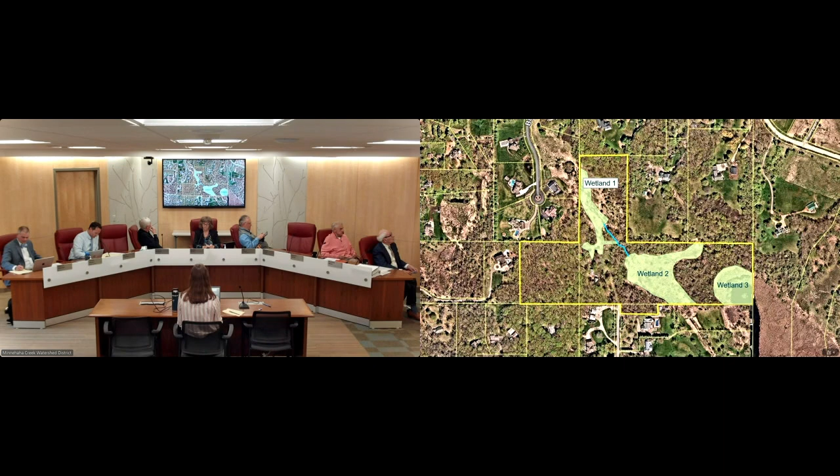As you can see on the right side of the slide, a channel on the North Arm Bay in Lake Minnetonka extends into the site. Currently, 3 wetlands are located on site and are part of a larger wetland complex that ultimately drains to the east to the North Arm Channel of Lake Minnetonka. The blue arrows show the direction of drainage.

So the last 2 slides show the existing condition. On this slide is the proposed site plan with the proposed 5 lot lines. The lots will be graded to include a hard-packed building pad, and then each individual lot will be sold to individual builders for the house construction. All single-family homes will fall under this permit's umbrella and will be reviewed in accordance with our rules.

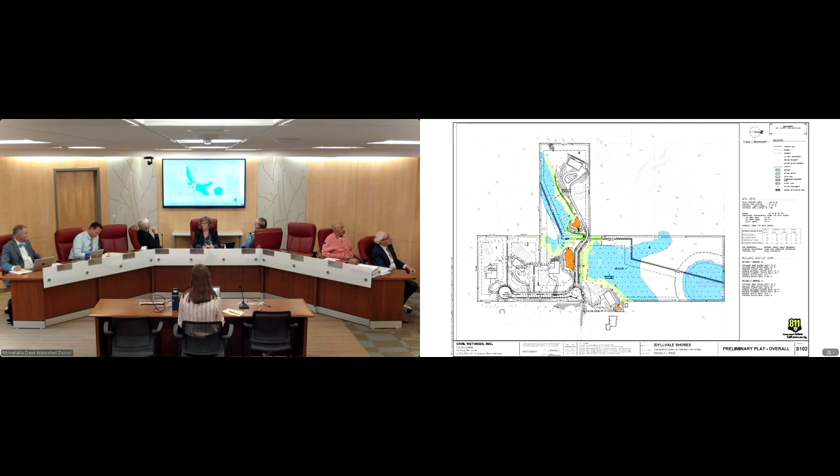Now moving on to the MCWD rule analysis for the 5 applicable rules. The first applicable rule is the erosion and sediment control rule. To comply with rule requirements, the applicant is proposing silt fences in areas down gradient of the proposed disturbance, shown here in red, as well as erosion control logs that will be added around the stormwater basins after they are constructed. Additionally, there will be inlet protection and a rock construction entrance in place during construction. At the end of construction, this site will be stabilized by turf grass seed and plant plugs.

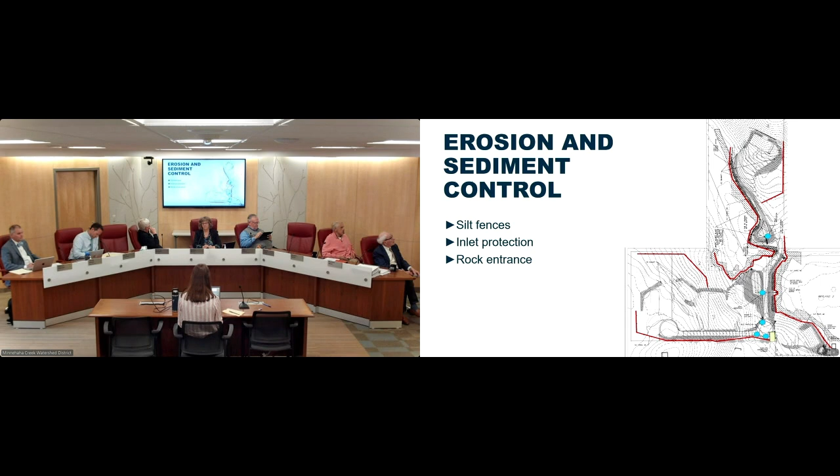Secondly, the stormwater management rule is also applicable, and with this, the project is required to treat 1 inch over the proposed new impervious surface. To meet this requirement, the applicant is proposing 3 stormwater basins, circled in red, with one being infiltration and the other 2 being filtration basins. Volume control will be achieved and rates will not increase. Bounce on down gradient water bodies will not exceed the allowable amount. Additionally, the freeboard requirement between stormwater basins and the building pads will be met through hydraulic disconnection.

Hydraulic disconnection is met when there's some kind of physical constraint that does not allow water to move in a certain direction between the basin and where you're trying to disconnect. Specifically for Basin 2, the southernmost basin, there's an off-site house directly to the south, so to provide hydraulic disconnection between that basin and the off-site house, they'll be adding a berm and a retaining wall installed directly up gradient of the basin.

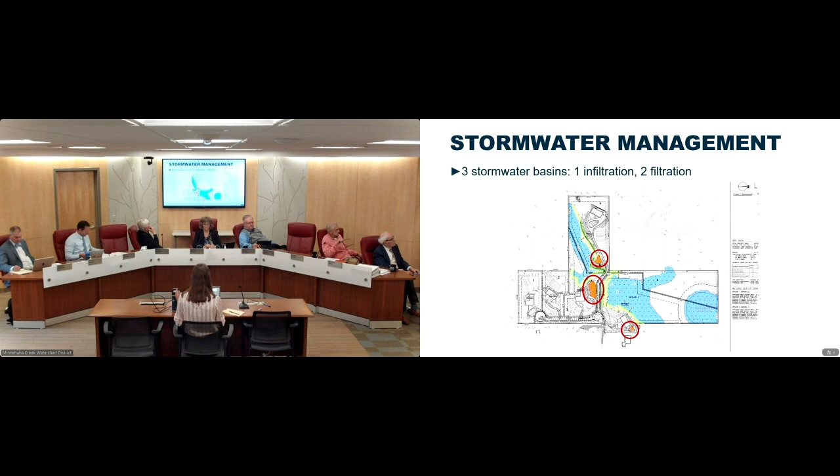So water cannot overtop and go towards that off-site house. The water body crossings and structures rule is also applicable for a culvert replacement in the intermittent stream in order to access the northern part of the site. The existing conditions are 2 existing 18-inch corrugated metal pipes, and as part of this project, the culverts will be replaced with 2 36-inch reinforced concrete pipes to be able to place a raised driveway on top.

This will safely access the northern lot without backing up water upstream of the crossing. In order to meet this rule, while the project will change hydraulic capacity because the culvert diameter will increase, the hydraulic capacity will be maintained and 100-year floodplain elevations will not change upstream or downstream of the culvert. Additionally, the project will not increase rise in upstream or downstream flood stages.

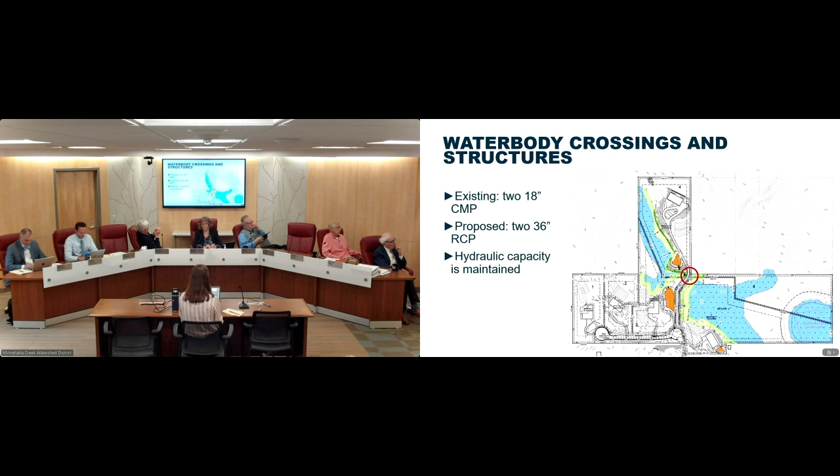As part of this rule, the project will also preserve navigational capacity, wildlife passage, not promote erosion or affect bank stability or water quality, and this is the minimal impact solution for the proposed need. MCWD staff and the district engineer have reviewed all of these items and confirmed compliance.

The wetland protection rule is also applicable, and wetland buffers are required on all wetlands down gradient of the proposed impervious surfaces. Wetland buffers, shown in green, will be provided around wetland 1, which is a managed 2 wetland, and wetland 2, which is a managed 1 wetland.

Buffer averaging and base width reduction will be utilized for both wetland buffers in accordance with the rule. The applicant will also provide buffer monument signs to mark the wetland buffer locations.

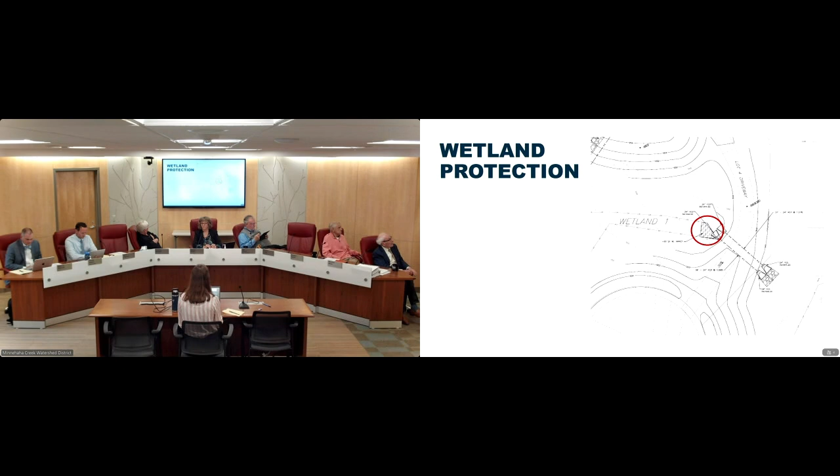Additionally, in accordance with the Minnesota Wetland Conservation Act, an exemption was applied for and received for a small amount of wetland impacts. This exemption falls under the de minimis section of the Wetland Conservation Act rule, which is typically used for very small wetland impacts, typically associated with infrastructure. So in this case, it's like a culvert.

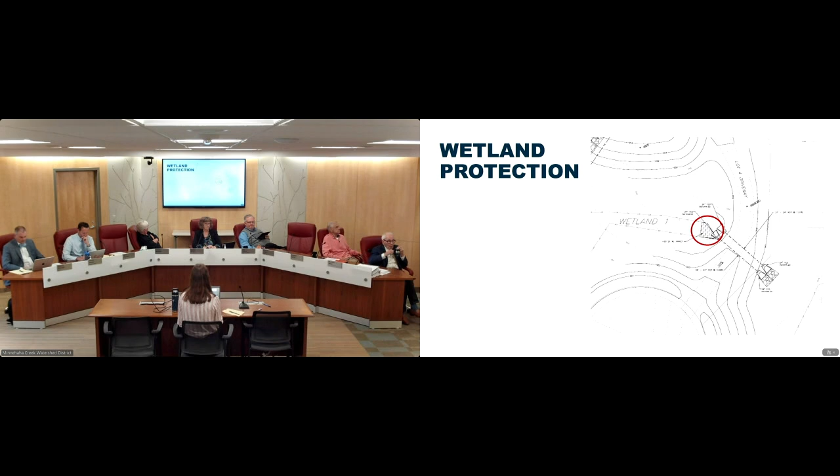Projects that fall under this exemption do not require replacement. So for this, there will be a total of 90 square feet of permanent wetland impacts, and these were approved under the Wetland Conservation Act for the culvert replacement.

With this culvert replacement, there will be work within the intermittent stream's floodplain. So to meet the floodplain alteration rule, the applicant is proposing more cut within the stream's floodplain, shown in green, than fill, in red, which is meeting and exceeding rule requirements.

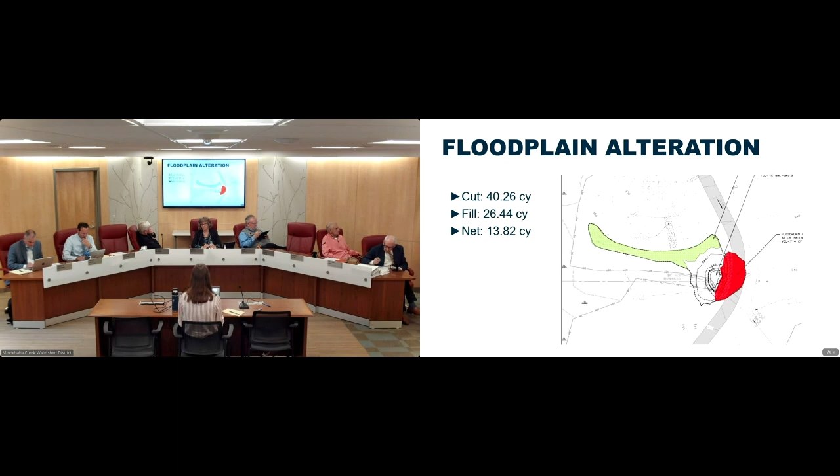Additionally, freeboard between houses and water bodies on site will be confirmed when the single-family homes are built under future permits and different developers. But as we said before, the building pads do meet hydraulic disconnection because of the way that they are grading and changing the slopes to raise up the building pads. To sum up the rule review, all 5 applicable MCWD rules are met.

I'll now move into discussing concerns that we've heard from the public. MCWD staff have been coordinating with members of the public since last November about the project and have given guidance about our process and the status of the permit review.

After sending out the public notice in late May, we engaged in an in-person meeting on June 3rd with the neighbors about the project here at the MCWD office. An Orono City Council member was present, as well as 4 residents who all live within 600 feet of the property. There were also concerns from an additional resident who was unable to attend, and those concerns were brought to the meeting. During the meeting, we discussed their concerns about drainage, negative impacts to wetlands, monitoring, and future permitting requirements.

I'll discuss each of these concerns in greater detail in the upcoming slides. So the first primary concern relates to drainage and runoff from the increase in impervious surfaces on site, as well as a concern about decreased water quality because of additional impervious surface.

As we discussed previously, the project is in compliance with the stormwater management rule, which requires impervious surfaces to be routed and treated. A couple of vegetated swales, shown here in yellow, will be graded to prevent impervious runoff from directing directly into the wetlands and instead route them to the stormwater basins.

As we will discuss in greater detail in the upcoming slides, there will also be erosion control in place to prevent sediment from running into these wetlands during construction.

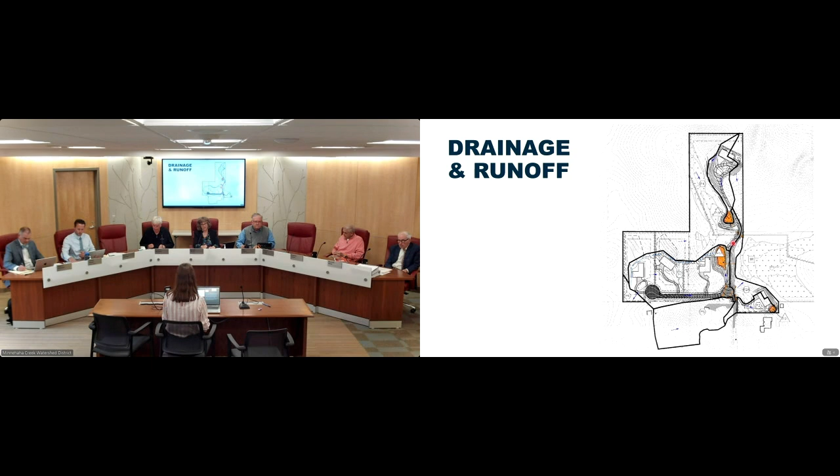These neighbors aren't related, with all these compliments they handed out, are they?

We next have item 11.1, Resolution 25039. Mr. Whisker presenting on Minnehaha Preserve work status, et cetera. Certainly. All right, well, thank you, President White.

Board of Managers, item 11.1 before the board for consideration this evening is Resolution 2539, which, if approved, would delegate authority to District Legal Counsel to terminate the contract for the Minnehaha Preserve Boardwalk, declare contractor default, authorize legal counsel to prepare and provide all notices to the bond issuer, Granite Re, and take any and all other actions legal counsel deems necessary under the contract and the bond to protect the district's legal and financial interests. So that's the purpose of the action.

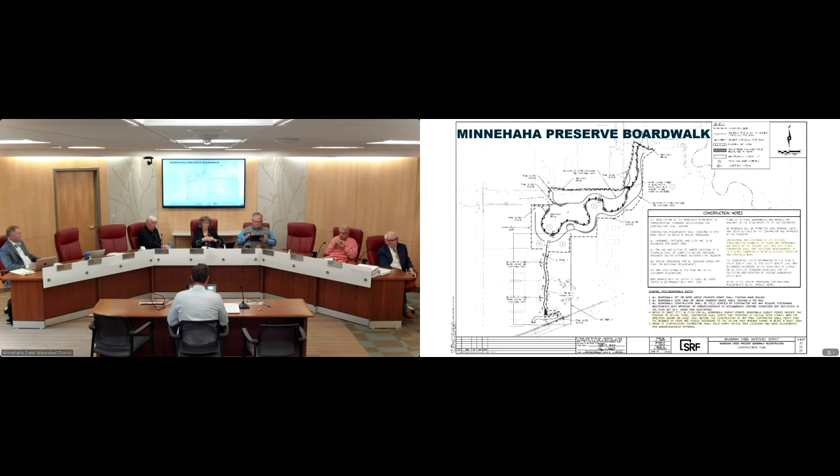So we've talked about the defective work in the past, so I won't go deep here, but I'll turn to that and orient the board to the sequence of events, starting with construction, which began in March 2023. Construction unfolded rather rapidly. In April, a series of inspections among the City of St. Louis Park and design engineer SRF culminated ultimately in a May 4th joint inspection that involved JTS as well, where there was some uncovering of about 8 random locations, and it was through that range of inspections that we revealed widespread deficiencies in the construction.

Subsequent to that, in the month of June, defective work notices were issued to JTS. Those ended up being supplemented towards the end of June, June 30th, based on 3 additional days of visual inspections conducted by district staff.

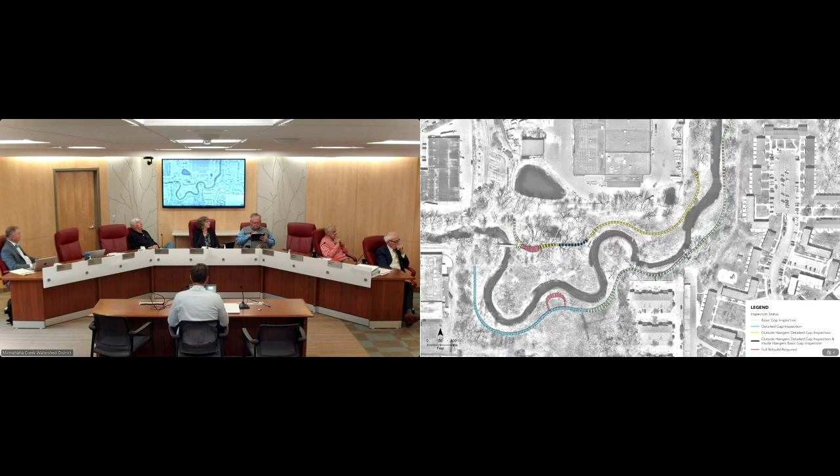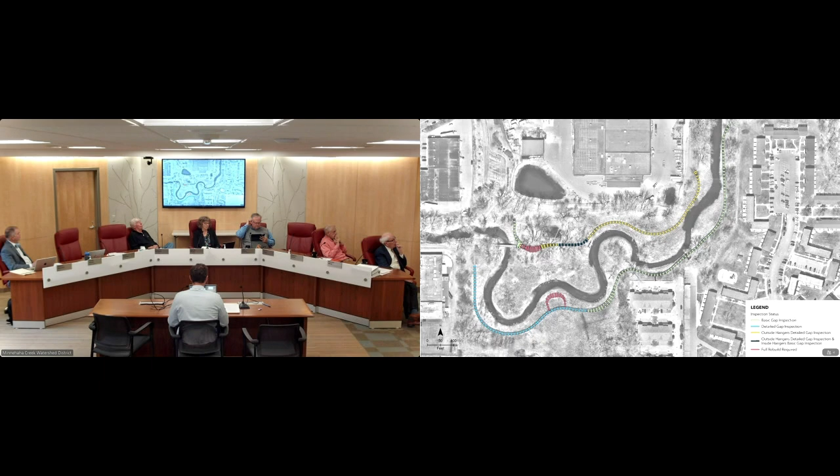During those June inspections, watershed staff worked to inspect all accessible boardwalk headers. They looked at joists and header connections on the south side of the creek in total. On the north side, where the boardwalk is lower profile and hard to get underneath, they did gap analysis on the outside hangers, which were inspected on the northern section.

In that June 30th supplemental defective work notice, JTS was advised at that time that inspections had revealed defective work at essentially all of the visually accessible headers throughout the project.

They were also advised of the contract's general conditions, specifically that they might be able to propose corrections that deviate from project specification, but they'd need to follow the process outlined in the GCs, the general conditions. If they did that, they'd be responsible for the engineering fees associated with review of those alternatives away from spec, and for the district's other costs incurred to evaluate those alternatives, including legal analysis. Again, those are provisions outlined in the general conditions.

The defective work notice itself outlined 11 categories of defective work. Everybody's familiar with those, including JTS and Mr. Kemper.

In a process undertaken with district leadership that took about 12 months, from June '23 to June '24, and through many meetings with JTS, MiTek the hanger manufacturer, and SRF our design engineer, JTS ultimately proposed that 9 of the 11 issues would be brought into conformance with plan and specification. Those are highlighted here—so really no issues with plans, substitutions, or code.

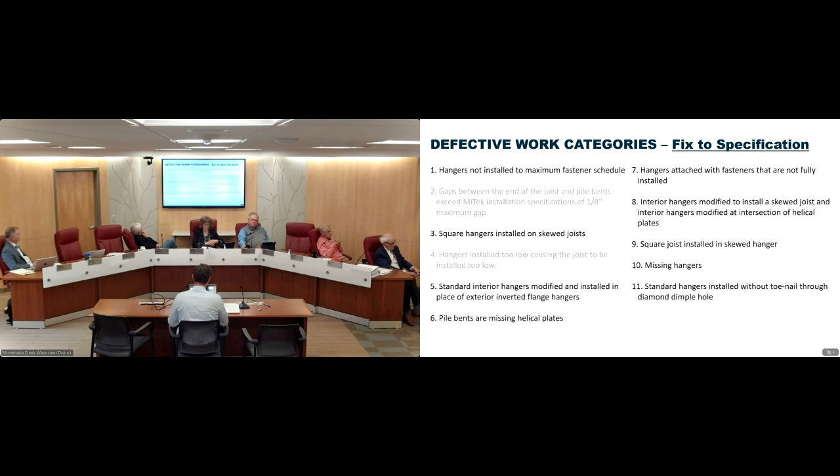The other 2 areas, which I'll step through briefly, were deficiencies where JTS was proposing alternatives to plan and specification. Those would require design engineer sign-off from SRF, our design engineer, and then they would need to be integrated into our contract documents via change order so that the city building officials had a comfort level approving those alternatives as alternatives to building code.

That was the sequence of events that we agreed on up front, mapping out that city building official approval would be a very critical step to document contractor readiness and actual legal ability to advance these alternatives in the field, because without city approval, they're not going to be permitted to move forward.

In many instances, this is sort of a secondary category—the nails weren't driven all the way in as required by spec.

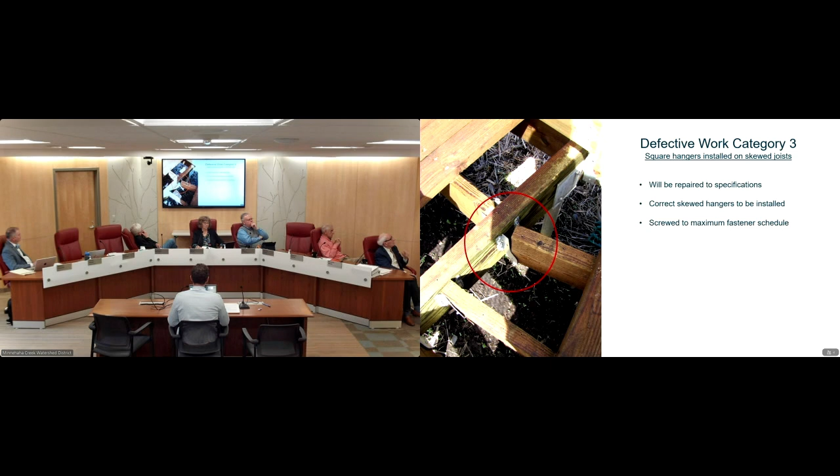We have a different issue where the plans clearly require that joist hangers suit framing conditions, with skewed hangers up to 45 degrees. Here we've got an instance where a 90-degree hanger was used on a skewed joist. From the top, the picture makes clear the issues with that configuration—the joist isn't properly seated in the hanger. You end up with a gap, and an inability to toe nail the joist and have proper fastening.

There's some issues with the helical pile bents.

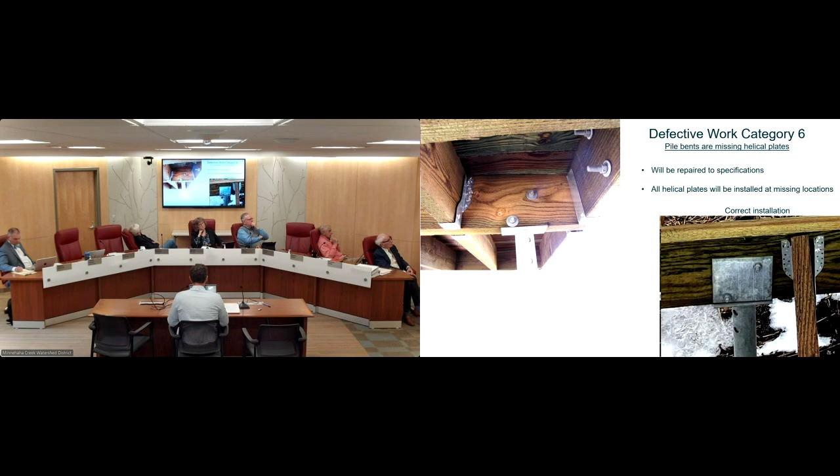They weren't either properly secured with helical plates, or the helical plates were installed but incorrectly. So here's again, an incorrect versus correct picture.

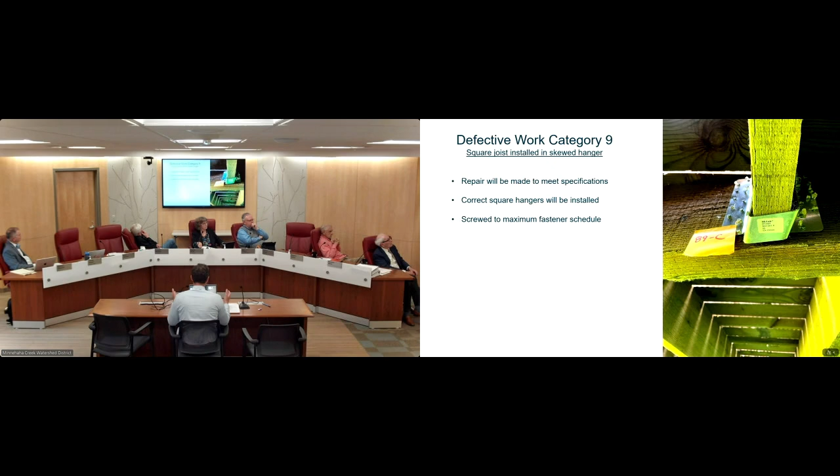This shows another instance where hangers were physically manipulated to bend out of shape where they were in proximity or conflict with helical plates. We've seen instances where square hangers were used for skewed joists, and this is the opposite - a skewed hanger for a squared one. I think this just underscores that they had the right assemblage of hangers, but chose to mix and match throughout the project.

Just breezed through a lot of issues with hangers. This is a picture of no hangers, where we have some joists that were essentially toe-nailed with screws into the headers, but not seated in any hanger at all.

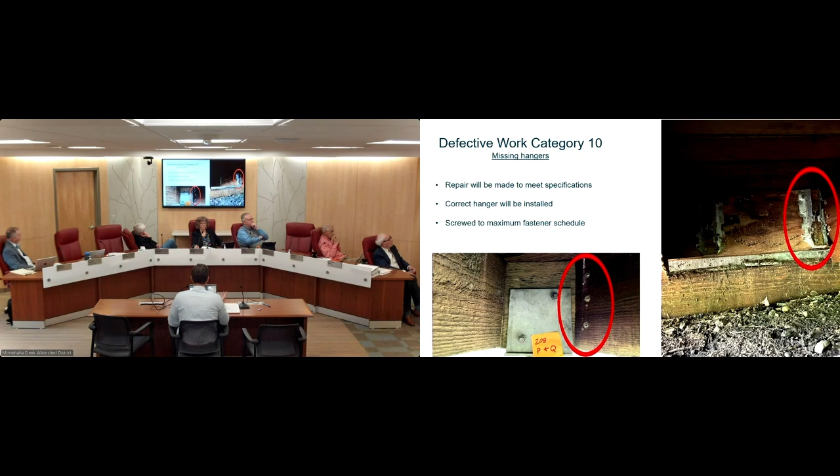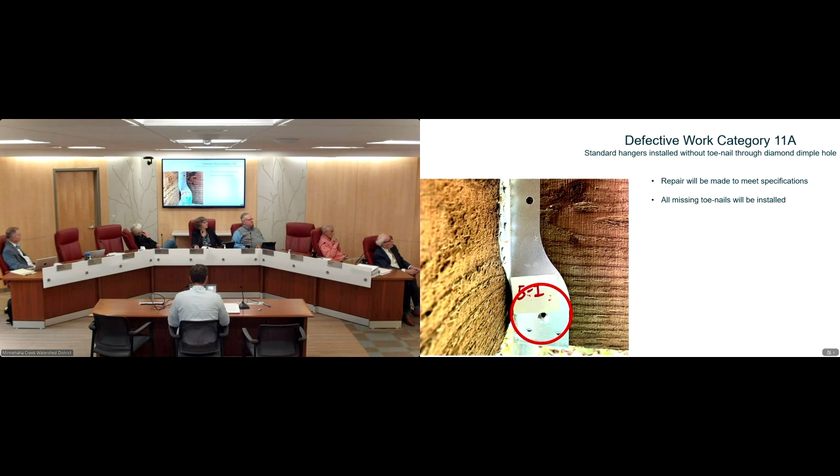Many of the hangers are missing the toenails - those are the dimples on the side that are supposed to prevent the timber from lifting. And so those nine issues were proposed by JTS to be brought into conformance with plans, specs, and code.

Then there's these other two situations. The first category relates to gaps, with some subcategories, between the joist and the header - you can see the gap highlighted here. For this level of gap, between 1/8 and 5/8 inch, they've provided computer structural simulation to show that this meets the load requirements, so those gaps are okay, as they're proposing to the city based on structural load modeling.

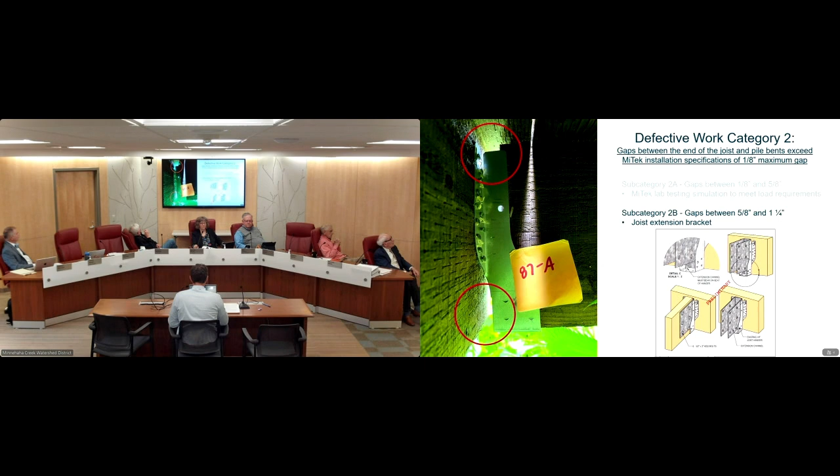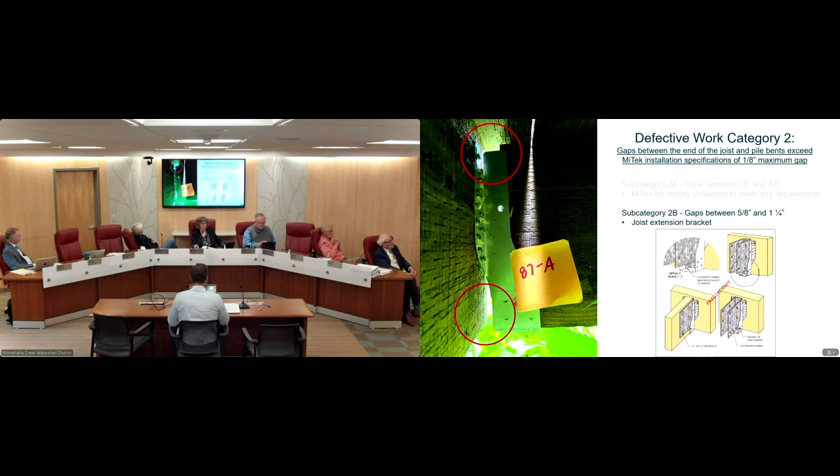For gaps larger than that, MiTek - JTS worked with MiTek - proposed this joist extension bracket, again an alternative, not in the product manual. This would be a metal sleeve or bracket that goes around the joist, functionally extends it, gets through-bolted, and then essentially closes that gap so the joists are seated properly.

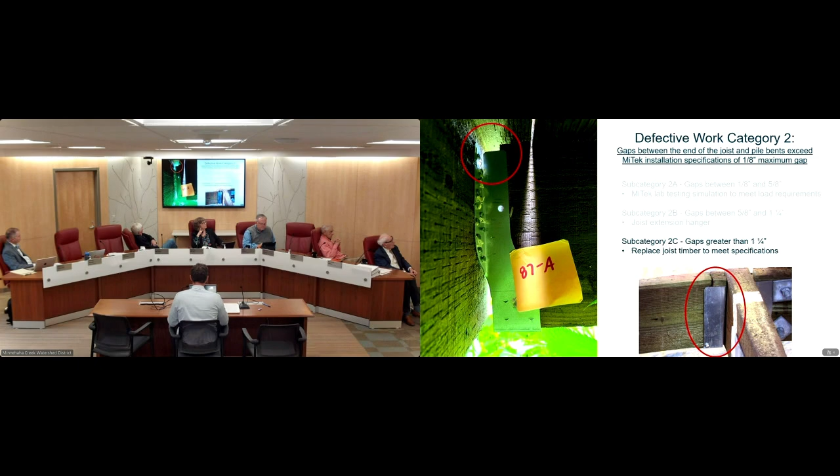Gaps larger than that are shown here, where it was just filled in with an off-cut piece of wood. Gaps greater than 1 1/4 inch, they'd replace the timber. So that was the proposal for the secondary category of deficiency.

The other category relates to use of hangers that were just put too low, where we've either got joists floating or they're shimmed up. You can see how they've shimmed them there with a variety of shims. The alternative here would be steel plate shims screwed to the bottom of the joist.

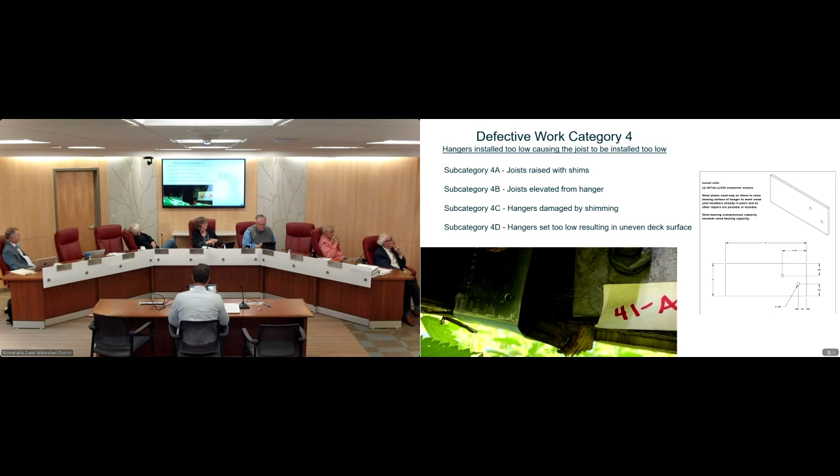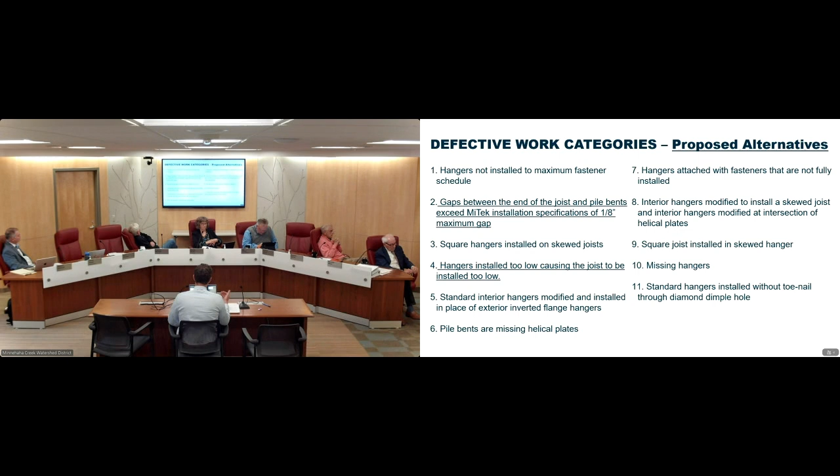That essentially covers the 11 categories of defective work - 9 in conformance with plan and spec, and 2 alternatives. Those alternatives are the ones that require integration through change order and sign-off by City of St. Louis Park approval as alternatives to building code. So that's where we've been.

I'm going to finish now with a summary of the process and timeline working through all that to get us to where we are today. Defective work was again issued in June of 2023. Around June of '23, JTS retained Mark Kemper as legal counsel.

It's our experience that communications essentially dried up between June and November, and there were no overt efforts made by JTS to make any proposed corrections.

Between November '23 and March '24, the board might remember I was tasked with engaging directly with JTS. I began with a face-to-face meeting I had with Jeff at our office, where we really talked through how we might work through a series of steps to review the problems and propose solutions, which ultimately needed to culminate in city building official approval.

Because at the time, the city was quite skeptical of alternatives, and if we don't have city building official approval, we have no ability to implement any alternatives. So that's what happened from November to March.

By Q2 of 2024, after all of those meetings and that process I discussed with JTS, their attorney, MiTek engineers, and SRF, we felt like we'd finally had a firm grasp on how the construction defects layered together, because many of these things occur at one point of connection - they're not just isolated. And then we had the package of solutions, including the alternatives.

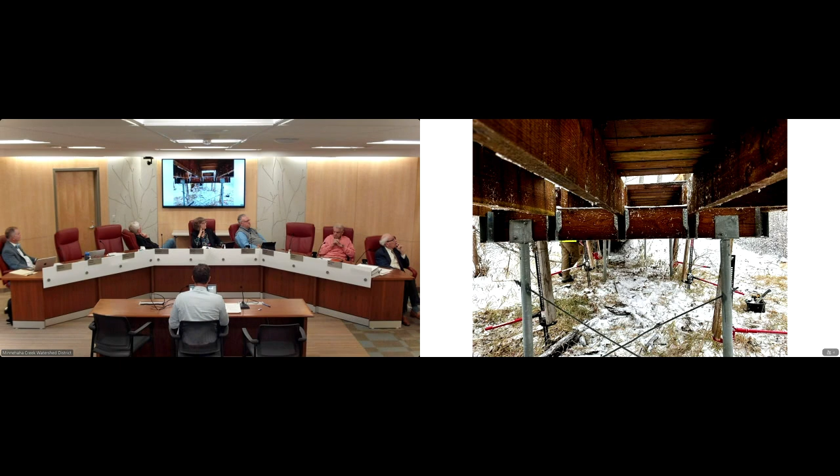Jacking here, I think, shows from underneath why that's important. You can see the joists lifted out of the hangers. And those outside hangers where the flanges are folded in are essentially hidden. So once nailing was completed during construction, they were covered with the joists and invisible.

It claims to have been verbal. I think from our perspective, moreover, as an experienced contractor, JTS understood that district staff had no authority under the contract to provide that direction. In fact, I think JTS had requested clarification on whether they could use larger or longer pile caps to avoid this issue. That question was raised, documented, and answered in writing by the project engineer through the appropriate process. So we have earlier conversations that were appropriately documented and worked through.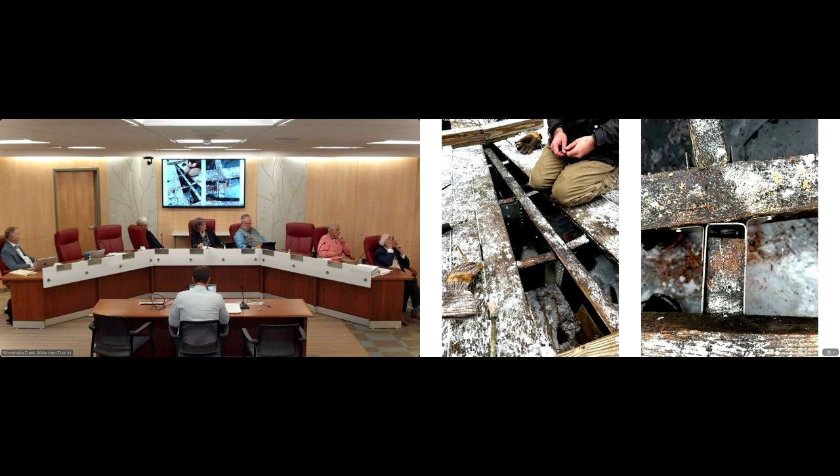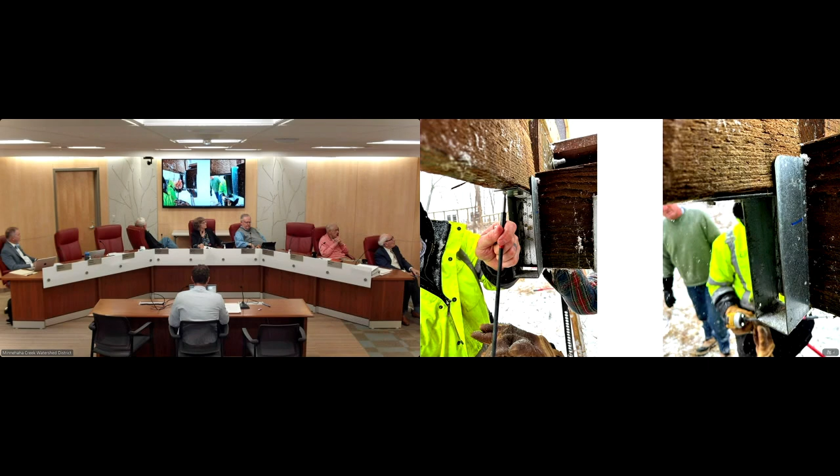These are the joist extension brackets that went in. We've talked before - they worked quite well. They closed the gap, as you can see. We also test drove some shims, which were affixed to the underneath of the joist beams.

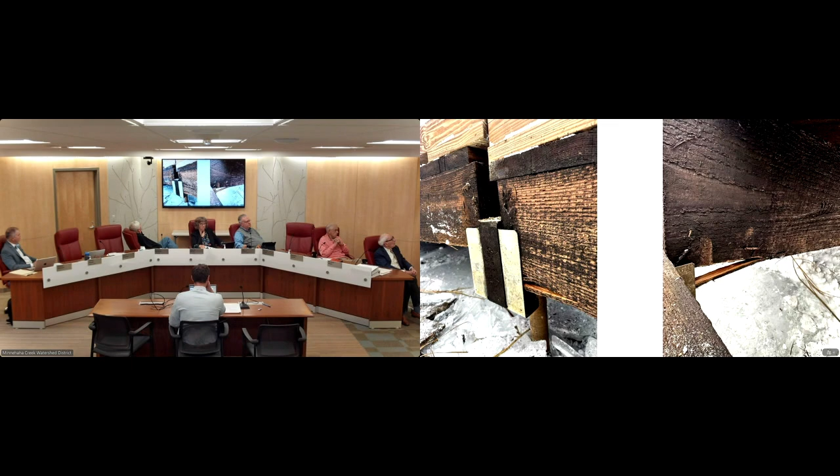We did have other issues. I think the corrections installed in these sections, because the jacking operation split some railing posts, we had tear out on timbers. So there were concerns with the methods of installing these alternatives that we'd want addressed if we were to move forward.

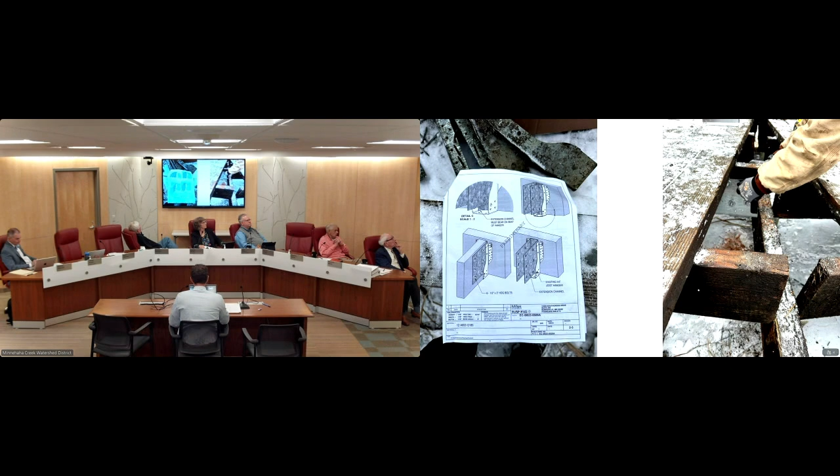Some of these slides are a little out of sequence. This is the max nail condition from screws. I'm showing it was possible to put all those in without splitting the pile caps. While the joist extension bracket ultimately was installed correctly, we had issues in the field test where it was installed in the wrong orientation, which gave me some pause and current concerns, since we had shop drawings and should understand how to put those on properly.

And that's while we have some pressure behind proving that JTS is capable of carrying these alternatives forward to get them installed throughout the project.

So that's where we were up through the field test, and that level of effort the district had to put into running the process to facilitate those. Where am I at here?

With the field test debrief, we met in January of 2025 after that December field test at City Hall, and we debriefed on some of the issues we'd experienced. We openly dialogued on all the challenges I just highlighted that we experienced out in the field.

We then drafted up and sent field debrief notes on February 3rd, framing out how we needed an implementation plan. That would be the next step after the field test - these are the issues we experienced, how are those going to get addressed when JTS proposes to actually implement these corrections through the whole project. We didn't hear anything for several weeks on that.